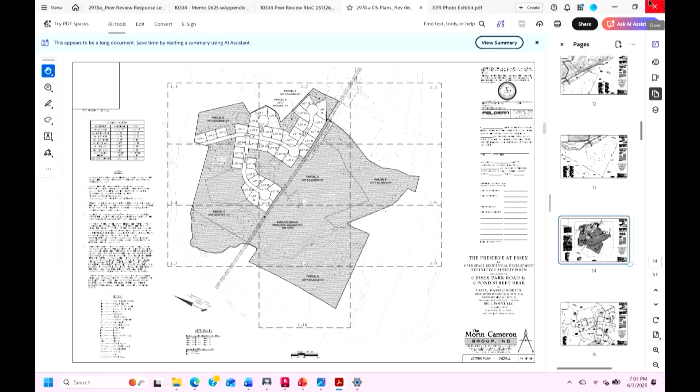I will take a motion to continue the public hearing opened on March 4th, 2026, continued to March 18th, 2026, continued again to April 1st, to April 15th, to May 6th, and to May 20th, and continued again till tonight, June 3rd, 2026, on the definitive subdivision plan application by Bell Point LLC for property at 0 Essex Park Road, 0 Pond Street Rear, map 147, lot 19, and map 142, lots 30 and 31, to create a 36-lot open space residential development subdivision under the Town of Essex rules and regulations relative to subdivision control, Massachusetts General Law, Chapter 41, Sections 81K through 81GG, also known as the Subdivision Control Law, and per a special permit issued on September 3rd, 2025, per Section 6-8, Open Space Residential Development, OSRD, of the Town of Essex zoning bylaw.

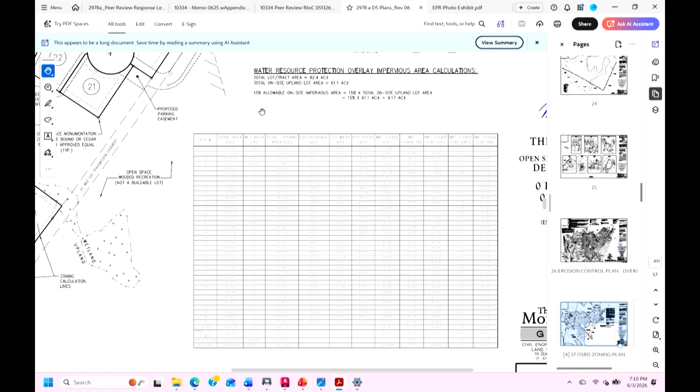What are the dashed lines, are the setbacks here, right? Yes, the dashed lines are basically the zoning criteria for structures on each lot. So that's the OSRD, a 12.5-foot front yard, I believe it's a 10-foot side yard and a 15-foot rear yard.

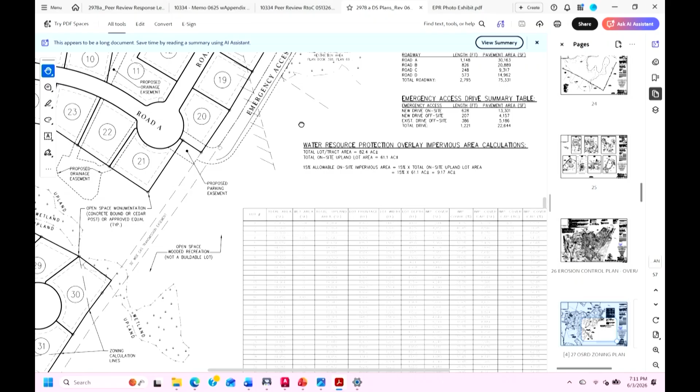So the impervious cap is both the paving and the house, right? Yeah, so the proposed impervious cover that's shown, the fourth and fifth columns from the right, those basically cover any impervious cover, including walkways, driveways, and building envelopes. That's what we designed the stormwater for. However, in the future, if somebody wanted to build a shed or a patio, they would be allowed to increase their impervious cover up to the cap number, but they would have to mitigate for stormwater, which is something we didn't design for, but they would be allowed to.

So for example, on Lot 1, you'll see we have 2,914 square feet of impervious cover proposed, and the stormwater system is designed for that. However, in the future they theoretically have 6,579 square feet of impervious cover they could build potentially. But then the HOA would have to redesign the stormwater facility. Yeah, we designed the stormwater system for what's shown, and in the future, just like a single-family house, there's a local stormwater bylaw, if you trip that threshold, you have to design stormwater to account for the impervious cover.

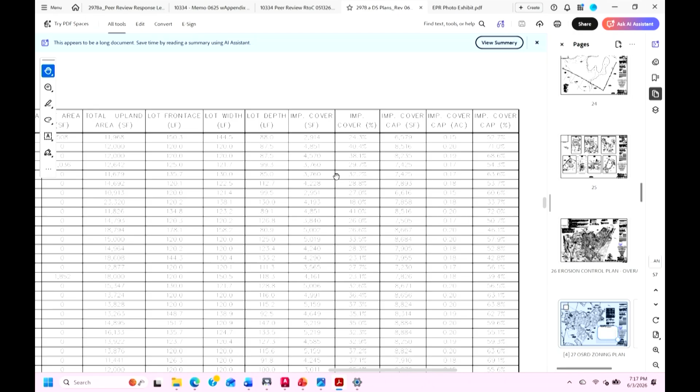Right, so as of right, they have this column—impervious cover square footage. If they want more, they could go up to this other column, but then the difference they have to resolve within their own property. And it shouldn't affect the overall project, because each house is limited to so much coverage, and they can't exceed that maximum coverage.

So this is the kind of thing that's good to know, because we will make sure that this is clearly spelled out in the decision, with how it's going to be memorialized in either the HOA documents or the recorded deed. So that's something we'll address.

That's what I'm wondering—is it possible that this chart gets recorded with each deed? Therefore, down the road, there's no argument with somebody coming and saying, well, they told me I could do this—to say, that's what's recorded, that's what you have to follow.

Each deed is going to reference the maximum coverage that they're allowed to have as part of the conditions we've drafted. Yeah, right, that's what I'm saying. So it won't be the whole chart—they'll just have each deed will have the total maximum amount on it. Okay, yes.

I'm not sure exactly, the deeds are something separate, but what will happen is these plans are going to be recorded and will be the plan of record for that lot. The draft decision asks that you include that information in the deed as well. I haven't seen the draft decision, but if that's there, then okay, that's going to be in there, just because it's the water resource protection overlay, and we want to be explicit about it.

Fair enough. It's a little hard, 10 years down the road, to know what happened to these. It sounds simple, but it's not as simple as it sounds, and you probably deal with it in your office. A little easier with electronics now though.

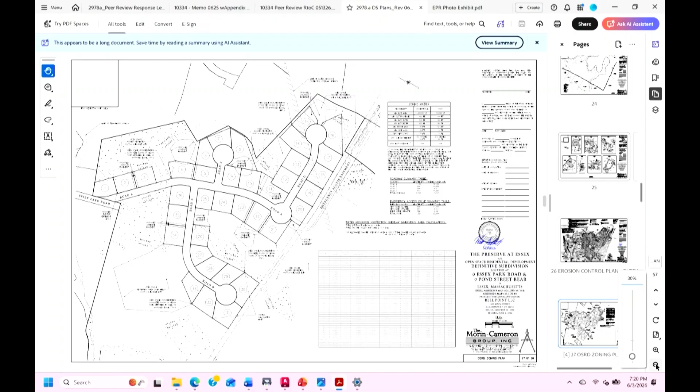There's a comment regarding soil testing. We talked to the peer reviewer, and it was agreed that we'll do additional testing as required, and we would ask for that as a condition of approval in the permit.

The next one is regarding, again, the reduction of the dimensional requirements. And again, this talks about the OSRD table we just mentioned with the impervious coverage.

Moving along to the open space requirement. Can I circle back to that? Didn't we talk about at some point having those percentages or areas put on a plan? They're in that table, that's what that table is. Right, I know that's what the table is, but I'm talking about having a plan, like the lotting plan or something like that. We asked as a condition that there be a sheet that goes with the lotting sheets that shows the coverage.

I guess because I know there's a table here, but is there a plan, are we asking for a plan that actually has a number on the plan of the lot? With the lot, yeah. Well, I mean, you mean for the drainage, that kind of thing. The lot numbers get assigned by the assessors, so they need to run the lot numbers through the assessors to get those approved and placed on the plans before they're endorsed. Okay, and is that sufficient, do you think, Val? Yeah, okay.

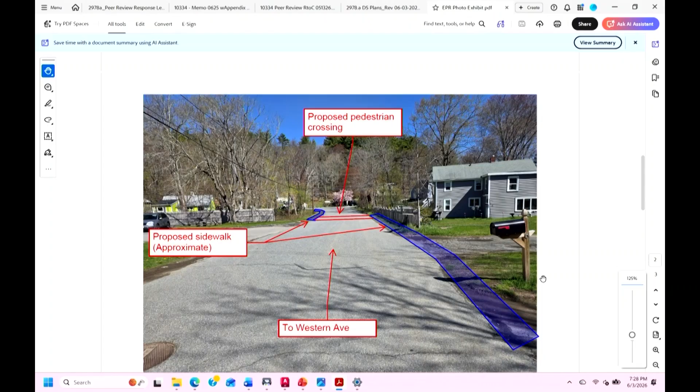In addition to our written response, we also provided an exhibit of photos. Take it with a grain of salt, please—I did the best I could to highlight where this connection in the sidewalk is going to be located, and the reasoning why. The first photo depicts where they're going to be, with arrows showing where you're standing relative to Western Ave.

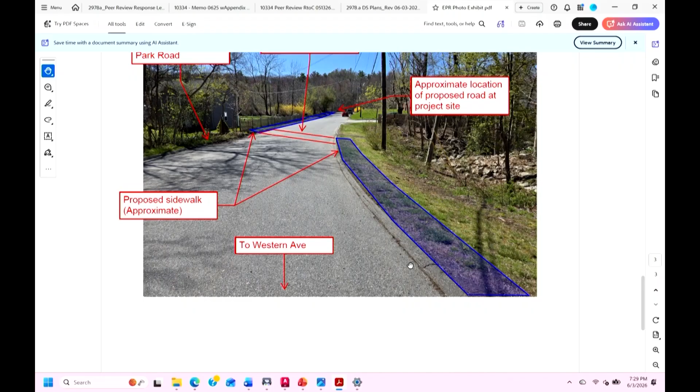This is looking back—Western Ave is right directly behind you, and this is looking down Essex Park Road. You'll see on the right side there's the culvert that crosses under Essex Park Road, but there's an existing natural shoulder that's a little wider and feasible to actually construct the sidewalk. This is what we provided in our response to justify why we had the crossing located where it is.

What had Weston and Sampson suggested, closer to Western Ave? Typically you'd have a sidewalk run all the way down one side—either the right side from Western Ave all the way down to our development, or the left side all the way down. But on this particular project we do have constraints. You have to cross at some point, and due to the septic system at 7 Essex Park Road and the existing culvert, we were basically constrained on where we could cross.

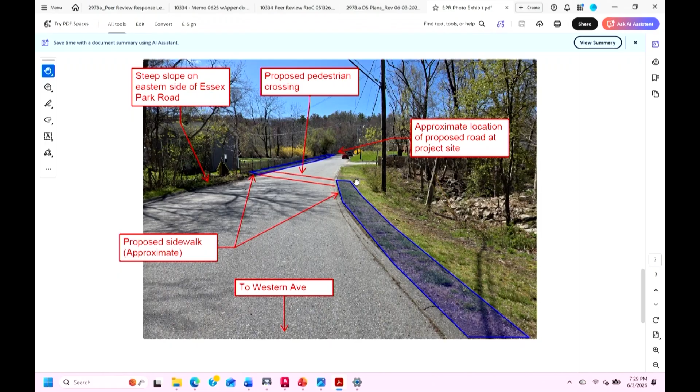Are there any questions with that?

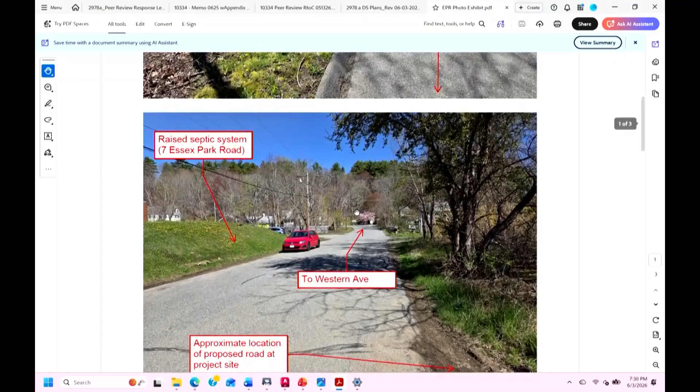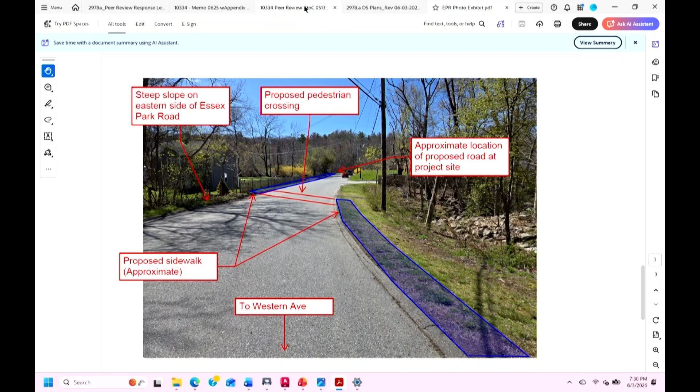So at Western Ave—well, once you get to Western Ave, will the sidewalk just end, or will there be more of a platform for kids to stand on? I'm just sort of seeing it ending and wanting to know how it's finalized.

What we're actually proposing, and it's a comment coming up, is we do have a crosswalk that crosses Western Ave and basically hooks into the existing sidewalk on that side. That will also have ADA curb ramps in full compliance. So there will be an area—we're also showing an area for a bus stop.

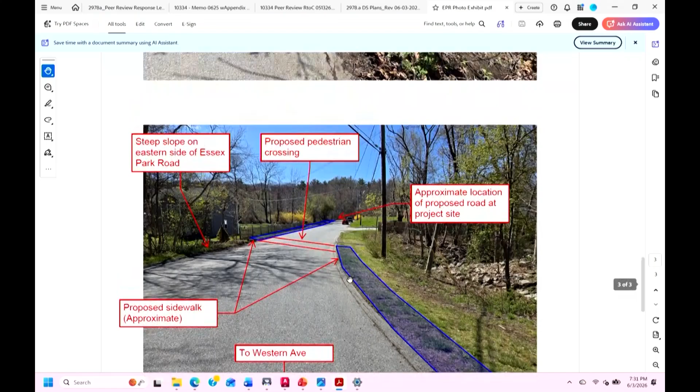Okay thanks, can you go back to the picture that shows the driveway at 7 Essex Park? Why aren't we bringing the sidewalk further up, closer to the driveway?

It's not closer because there's an existing curb cut for the drainage. There's no closed drainage system on Essex Park Road, so we're actually going to have to cross one of them. There are two curb breaks, and we're just trying to limit that and maintain existing drainage patterns.

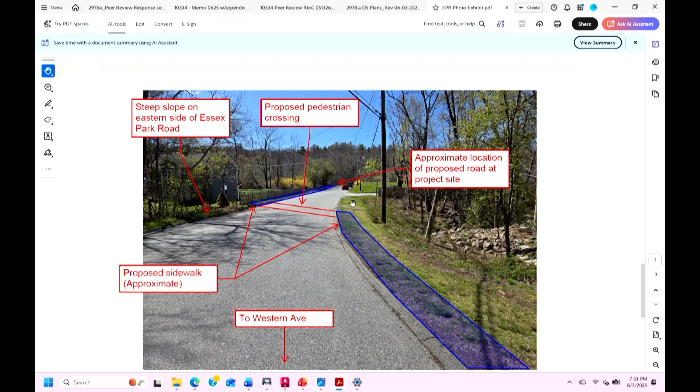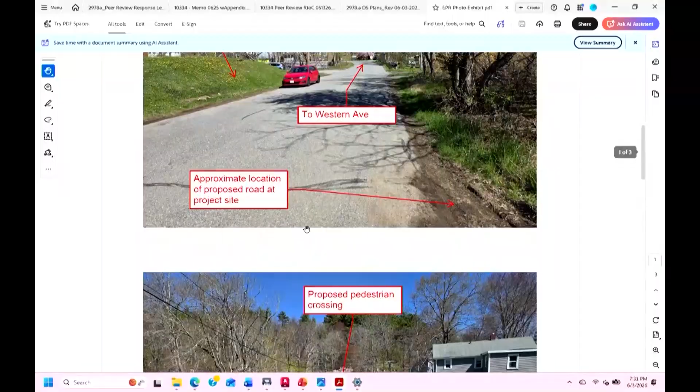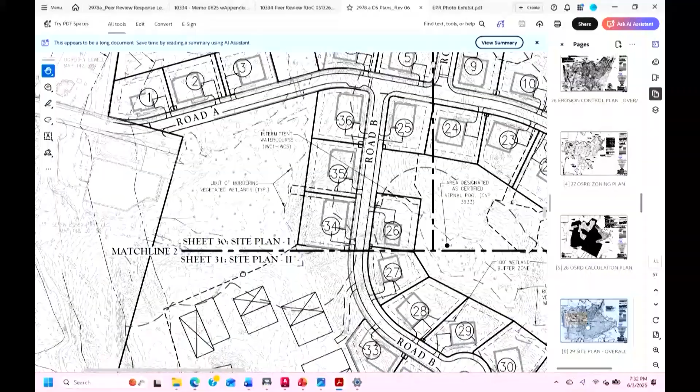How far can kids walk to a bus stop? Do you know how far kids can walk to a bus stop? Oh, I don't know. I was only looking—I thought you might have an idea. I'm not actually sure we have a limit. Buses don't even come down Lufkin Street, you have to make your way to Harlow. Some buses seem to pick up miles away and some go door to door, so that's why I asked—if they're gonna have to go through, I just want to make sure.

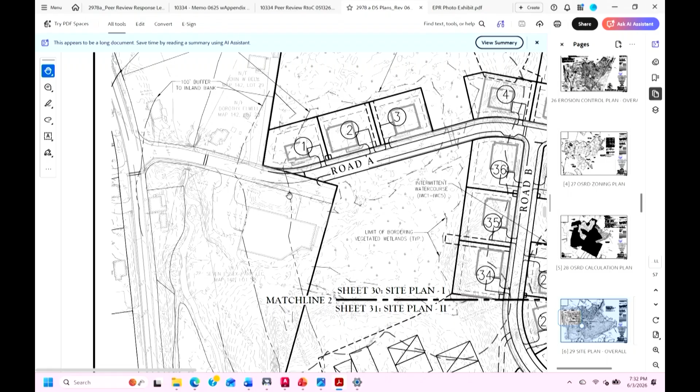We added this at the board's request—there is a limit on how far you have to walk, I think it's like half a mile. So should we check on that? Yeah, probably. I don't know the exact limit, but I do know that within 2 miles as the crow flies we're not required to provide bus service, and this would probably fall into that, so you'd end up paying for bus service there anyway, so it may not be an issue. I just think we should ask that question rather than finding out after you're three-quarters of the way done that we have to change something. We'll check into that. And it's not just bus service to elementary, it's bus service to middle school too.

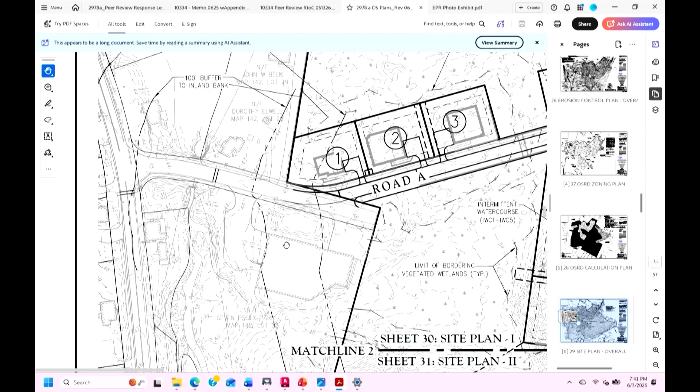The next comment regards the infiltration trench. We expanded the width of the shoulder of the road. We used to have a 2.5 foot width stone trench, and now we increased that, so there's basically going to be a little bit of earth behind that trench. We also added an impervious barrier going down the trench to force any water runoff into the trench to go down into the ground rather than potentially breaking out of the slope.

This is shown on the detail sheet with the impervious barrier. On the emergency access road, it's hard to see on the plans, but it is there at a 40 scale, moving something 1.5 feet. A little hard to see, but we did expand the width as much as practicable.

There is a section as we get to the wetland crossing where we had to narrow it down because we didn't want to fill more wetlands. But with the impervious barrier, it will force any runoff to go into the ground at that location.

The next comment was regarding what they call curve numbers in the hydrologic soil groups that we use. So any site is typically mapped by the NRCS, and it defines the hydrological soil group based on a number of factors. What's the underlying NRCS?

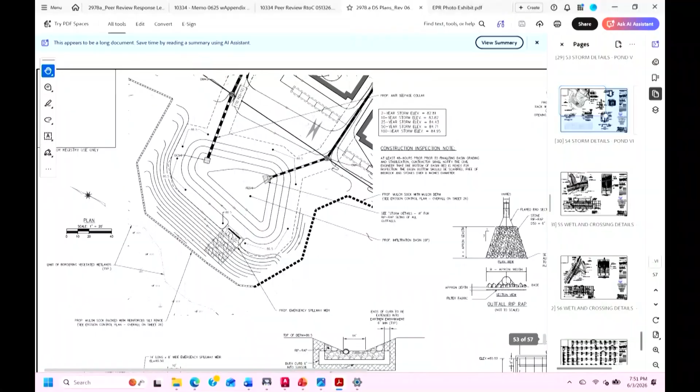The next comment requested that we show graphically the actual dimensions of the riprap we had calculated. So all the flared end sections now graphically show the riprap sizing, the width and length of the apron, and the stone sizes, which we call the D50. Basically, the riprap is an energy dissipator for water leaving a pipe.

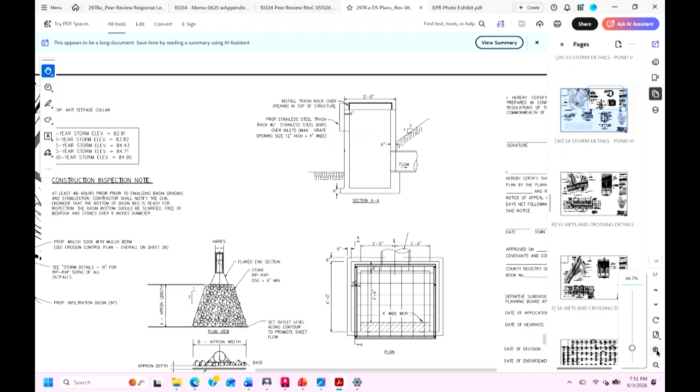That was shown before. On the plans themselves, at a 40 scale, it's really hard to see, but if you scaled that flared end section inside the pipe, it would match the dimensions shown on the detail, the not-to-scale detail. So that is now to scale on the plans.

The next comment regarded the location of the discharge of the flared end section. We adjusted everything so they now discharge at the bottom of the slope rather than at a mid-slope location, to prevent additional potential erosion. The plans have been updated to incorporate that.

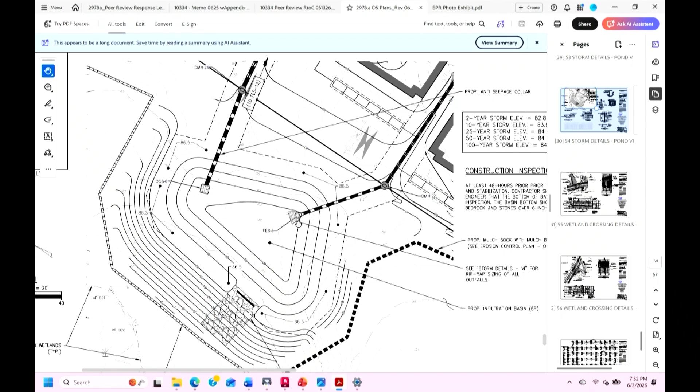The next comment, as I mentioned, we were able to eliminate 4P. There was a comment about constructability concerns associated with that pond, so eliminating that pond basically satisfies this comment.

The next comment regards access within structures. Based on discussions with the peer reviewer, we agreed that if the structure is greater than 10 feet in depth, we would increase the manhole size from a typical 4-foot interior to 5-foot. So there will be a 5-foot structure if it's greater than 10 feet. That's just so, hopefully it would never happen, but it would be more accessible for a person to get into. It's still a confined space, but it gives a little more room because of the depth.

The next comment - there was a scrivener's error on the plan. For some reason, the curbing got frozen, so we revised it to show a curb on what we call a level spreader for the emergency outlets. That is detailed on all those drainage plans. We call out the actual curb, which promotes even flow of water when it leaves these ponds in the event of a failure of the outlet control structure.

These emergency spillways are designed to never have water leaving during what we model as a 100-year storm. However, if something did block the pipe or the orifices and it backed up, then it would have adequate area to leave that pond and not back up.

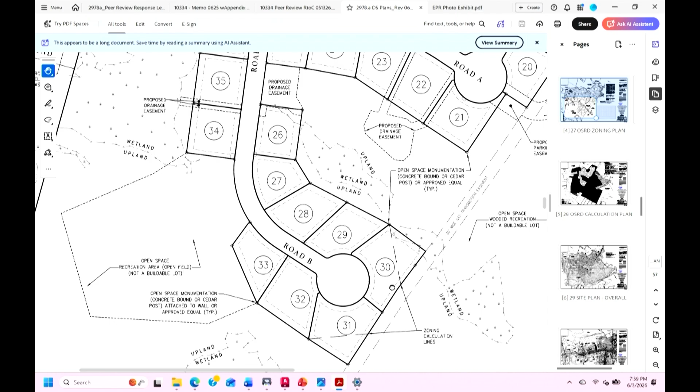The next comment regarded the open space sign detail. We did include a kiosk detail on our plans, just a preliminary thought of what we would be providing. That would be located basically at the parking area we have proposed. Based on the planning board comments at the last meeting, we have also added a proposed directional sign for the open space at the entrance to the development. So that is shown on the site plan.

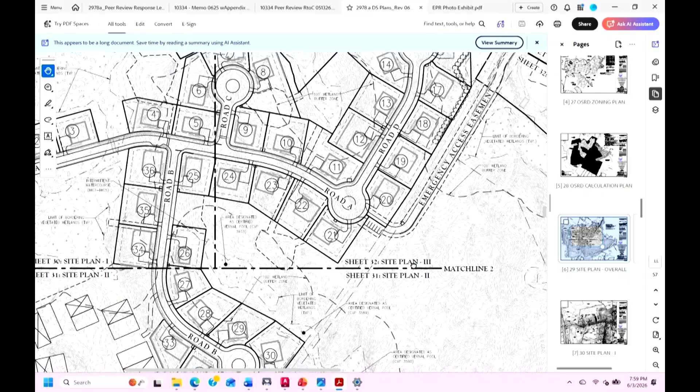Which plan is that? Sheet number 30. So yeah, you'll see that we have - okay, so yep, here's the proposed open space directional sign. That will basically have signage noting that the open space is up through the development, as well as the monument sign for the actual development itself.

So then there's also - okay, here's proposed open space parking, proposed trail kiosk. Correct, a kiosk. And the kiosk, you'll see on the details, we tried to model - we've used this a couple times - it's very similar to like the Essex Greenbelt type. It's almost like a little slight roof structure, has a map on it, just a typical 'this is the open space, these are the trails, this is where you are' kind of thing.

The next comment regards the open space. This has been discussed with the board, and we would request that this be a condition of the approval. It's commenting on the maintenance requirements, and we have previously discussed this in depth.

The next comment was noting that they thought a land disturbance permit would be required. However, our understanding is that per bylaw section 5A4, the planning board's issued definitive subdivision permit, final approved plans, and/or applicable special permit or site plan review and associated permit conditions must require compliance with the stormwater management bylaw and associated regulations. A separate land disturbance permit will not be required. So it's our understanding that the approval of the definitive subdivision would not require a separate land disturbance permit.

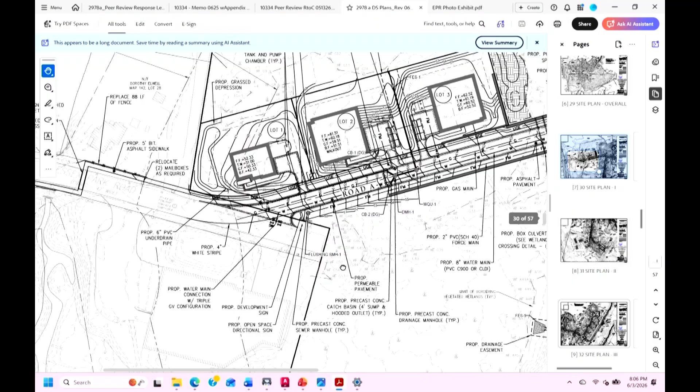The next comment regarded, within the development, a crosswalk going to the mail kiosk. Looking at this, we came up with the idea to relocate the mail kiosk further into the development, and we added a turnoff. If you keep panning up, it's close to the intersection of Road B, right up there. This serves almost two purposes: it's a better location for internal people walking to get their mail, there's a crosswalk there, and the sidewalks all go there.

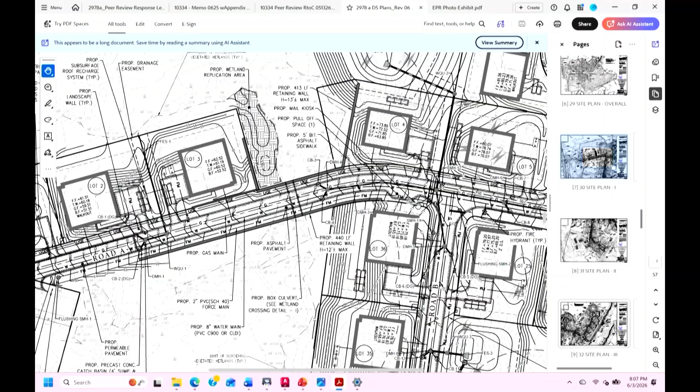It also provides a turnoff now, so if somebody's coming home or leaving the development, they could cross over and pull off so they're not in the right-of-way, and have an area to stop, get out of their car safely, access the mail, or walk—there's a sidewalk accessing this and crosswalks to get across Road A at this location. So, all said and done, we believe this is a better location, although it's not right at the front of the development. Lots 1, 2, and 3 might have to walk or drive up a little further, but it serves the same intent for the mail.

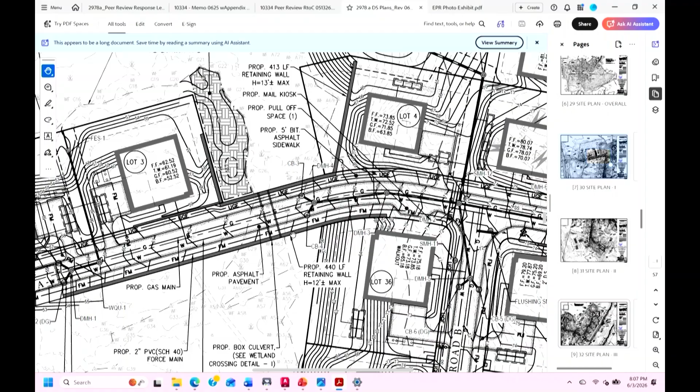Have you talked with the post office about that? We have not yet—that needs to be confirmed by them. My understanding is that any private development will have a community mailbox versus individual house mailboxes. Yeah, I believe you're right, but they also specify where they want them. Throughout this process, there's still legwork and confirmations to do, but we believe this is a good location. Again, this turnoff also provides an area for a mail carrier to park—I'm sure there won't be a problem, but they have to approve it.

Okay, so we'll add that to the decision as a condition to have U.S. Post Office approval.

The next 3 comments related to the traffic report. There are responses provided regarding the actual traffic study—I'm not the expert in that. One thing requested was that the traffic impact assessment be revised to include the stamp and signature, which we have now provided. There are also responses to some comments regarding the crash data justifications used in their calculations.

So that's why you've resubmitted the original memo, because it's stamped now? Correct, he just stamped and signed the original memo.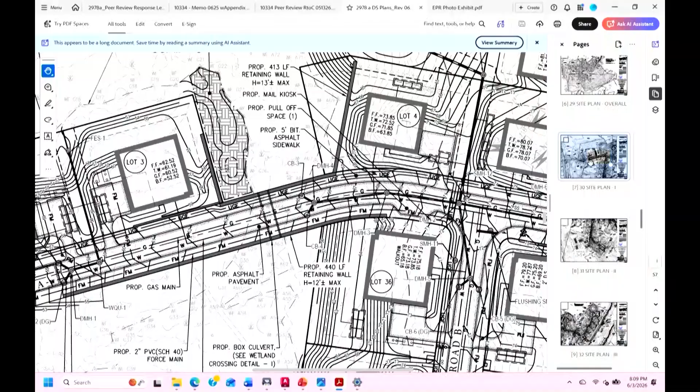The next comment, we revised the plans and added two notes based on the peer review comments. One note is that signs and landscaping adjacent to the roadway should be designed and maintained to remain below 24 inches above the driveway so as not to restrict sight lines. The other is that snow windrows within sight triangles of the roadway should be promptly removed where such accumulation will impede sight lines. This is typical at any intersection, you don't want something that obstructs somebody from seeing around the corner. So we added those notes to the plans.

The next comment regards the environmental impact assessment. To summarize, the LSP provided this comment, and based on his opinion, no adjustments to the exposure assumptions on which the temporary solution is based are required for the residential development—basically saying he does not believe there's any impact from the contaminated site for this proposed development.

The next comment regarded private drinking water wells. This project has no private drinking water wells, it's serviced by town water, so no issue with that one.

The next comment regarded dewatering. We do have a dewatering detail. It's also noted that this project will require a construction general permit from the EPA, which dewatering is regulated under. There are now testing requirements for daily dewatering turbidity, so you have to have a qualified professional go out, take a water sample, and confirm it's within the allowable discharge for turbidity, which is basically suspended solids in the water. It's a way that it's regulated, and it's something required as part of the project.

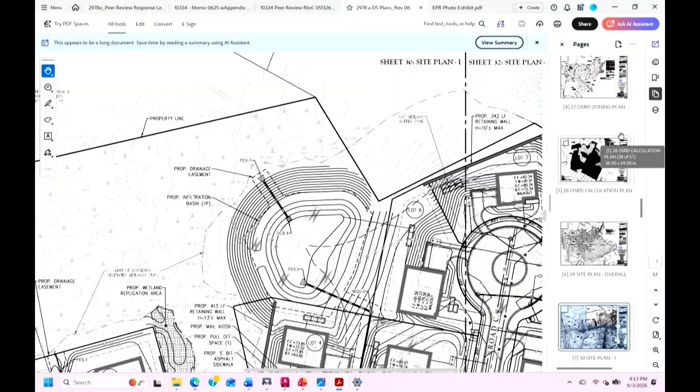The next comment regarded stockpiles. We do show the proposed stockpile locations—this is what we're anticipating, however these might be adjusted based on the contractor and the phasing of the project. The stockpiles will also be regulated under the construction general permit. For example, you can't have a stockpile with no activity for 14 days without being stabilized with temporary vegetation.

The next comment regarded dust control. Again, that will be under the construction general permit, along with the dewatering and stockpile requirements. This is all outlined in our construction phase operation and maintenance plan that has been submitted, covering stormwater pollution control during construction, and there will also be a final long-term stormwater pollution prevention control plan, which has already been submitted.

The last comment regards the existing culvert. I believe we discussed this last meeting as well—we noted that we did an inspection, and there will be a pre-construction meeting and a post-construction meeting with town officials and the developer, documenting the conditions of Essex Park Road, the pavement, as well as the culvert itself.

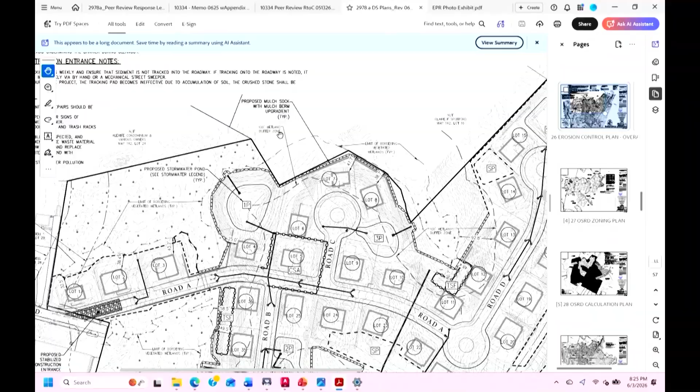So what are the little squares, are the hay bales? If you scroll up to the top of that plan, keep going a little bit to the right. So there's your erosion control.

So we got a mulch sock with the mulch berm, and then a mulch sock backed with reinforced silt fence. There are different types of erosion controls, but they're physical barriers that are installed. A mulch sock is typically a 12-inch sock filled with mulch, which allows water to pass through but stops the sediment from going through. That will be a physical barrier that's installed, and will define the limit of the clearing, the limit of work, the limit of grading, the limit of the project extents.

I guess I have a question. Accidents happen. Sometimes trees get removed when they're not supposed to be. Those trees have value, and we can seek compensation for trees removed outside of the erosion control zone, the limit of work. So my concern, and Simone raised it too, is that if there's no survey of those individual trees, and those accidents sometimes happen, we have no way to assess that tree. An oak might be worth more than some other junky tree. So that gets to the heart of why you might survey a section beyond the limit of work, so that if an accident happened, value can be assigned to those trees that were accidentally removed.

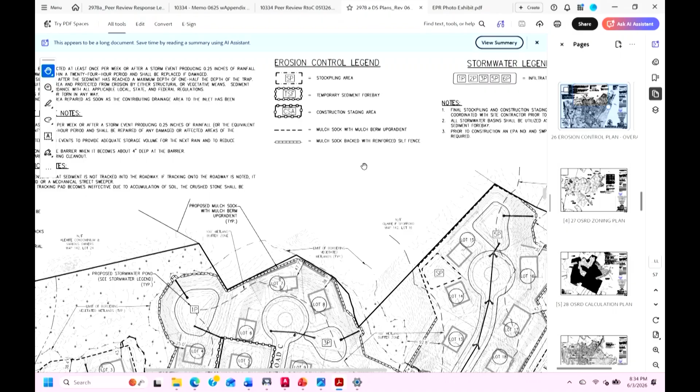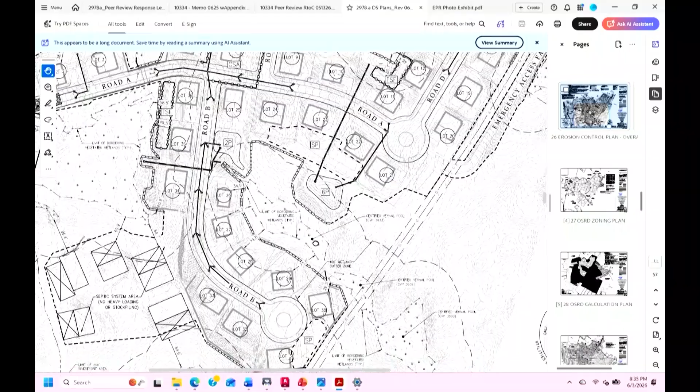Yeah, I mean, they had sort of laid out a squiggly line to indicate where the trees would be. So I'm just suggesting that instead of a squiggly line, they mark trees that is representative of where they think the limit is. Obviously where the septic is, we've called that open space, so those will all be cut down. I'm just trying to define where they're going to stop cutting down trees, so that we know. It's really unclear right now where it is, and they're saying the limit of construction is going to define XYZ, but it doesn't really define where we stop cutting trees.

They could decide to cut 20 more feet out just to have more space. I just want to know where the tree line is going to be. But from what Will has said, the limit of work is the property line between the developed area and the open space, and you wouldn't be cutting trees beyond that.

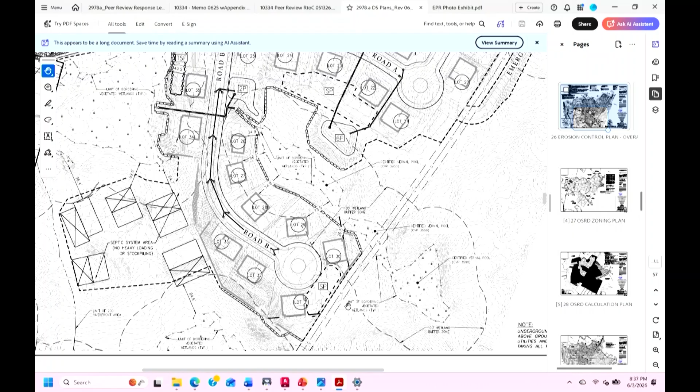Sorry, yeah, no, I'm in agreement with you, with Simone. But couldn't we - typically what I would see is a surveyor go out there and stake it, right? Because we wouldn't want to put out erosion controls because there's also grubbing involved - you've got to clear out all the underbrush and other things. So typically they'd stake it.

Once they stake it, couldn't we also condition it that they'd go and put surveyor's tape on any tree over whatever the requirement is here, 12-inch diameter, so that we would know: here are our stakes, this is where our erosion controls are going to go, and now all the trees beyond here are going to be marked with tape. Then at the end of construction, the tape comes off, we know they didn't ruin those trees. That's just one way of doing it.

So are you suggesting they could do that and put those stakes and trees on a plan so we know where it is? I think that would solve what you and Beth are proposing. Yeah, that sounds reasonable - at least they're surveyed, and then physically in the field, which is really the most important part, is that we have surveyor's tape on them. Right, yeah.

All right, so rather than doing it ahead of time, it would still be done ahead of time, but it would be done when they lay out the survey for the perimeter of the developed area. And at that point, when they're laying that out, they can mark the trees over 12 inches and tape them, and those can be a photographic record of the trees that fall into that category.

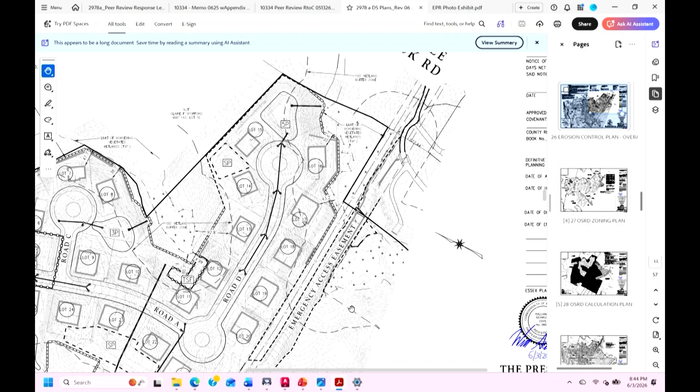All right, thank you. Okay, so board members, let's walk through the decision draft here. There's still, as I said, based on the responses Moore and Cameron's given, and what Weston and Sampson comes back with, there's going to be another draft with a lot more detail capturing anything outstanding from our discussion that needs to be a condition of the decision. So I'll be working with Val to go through and cross-check those to make sure we've captured everything.

And then on the waivers, so to backtrack a little, how the process is going to go at our next meeting is we have to keep the public hearing open for the purposes of accepting materials, because whatever comes from either Moore and Cameron or Weston and Sampson has to be received in the public hearing. So at our next meeting, presumably, we will have the feedback, hopefully sooner than from Weston and Sampson. We'll hopefully get it next week sometime so that whatever needs to be incorporated into the draft decision can be added.